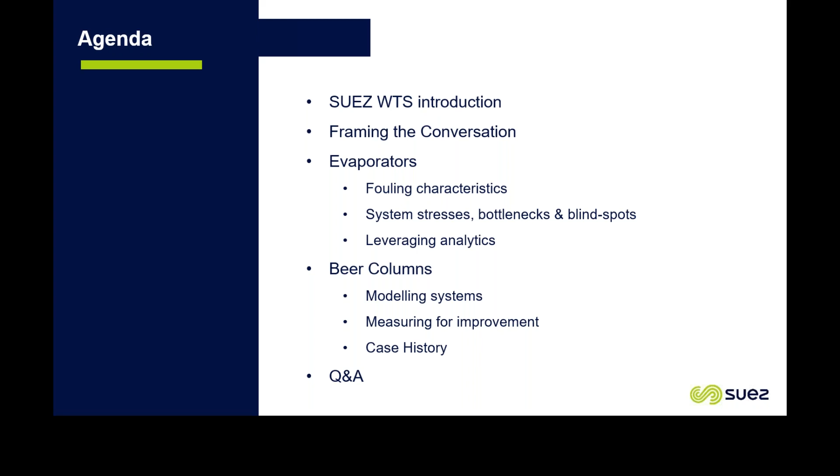So let's get started. It's possible some of you have wondered, who are those guys? This company called SUEZ.

My apologies there. I had a bounce. Get back here. Just a moment, folks. I'm getting myself in shape there.

There we go. So SUEZ has been around for a long time, and in fact, it's a French-based utility company that specializes primarily in large private municipal water and wastewater facilities. Dating back to the early 1800s, it's actually one of the oldest continuously operating multinational corporations, and as kind of in the picture there, we built a canal. That was the same SUEZ company in its early years.

Over the years, they've acquired numerous equipment and other water treatment related entities with names many of you may recognize, including some of the businesses that came with the 2017 acquisition of GE Water that is part of SUEZ Water Technologies and Solutions now. Degremont, Osmonics, Glegg, Zenon, Monsal, Sievers are just a few of the businesses that are now part of SUEZ Water Technologies and Solutions under the umbrella of the larger SUEZ organization.

Our history in the ethanol process space spans nearly 40 years, starting with efforts in gluten dewatering and fermenter deposit control programs, primarily in the wet corn milling space many years ago. Since that time, we've leveraged our core expertise in corrosion control, scale and deposit control, and separation technologies to develop a suite of products that support the challenges that face the ethanol industry.

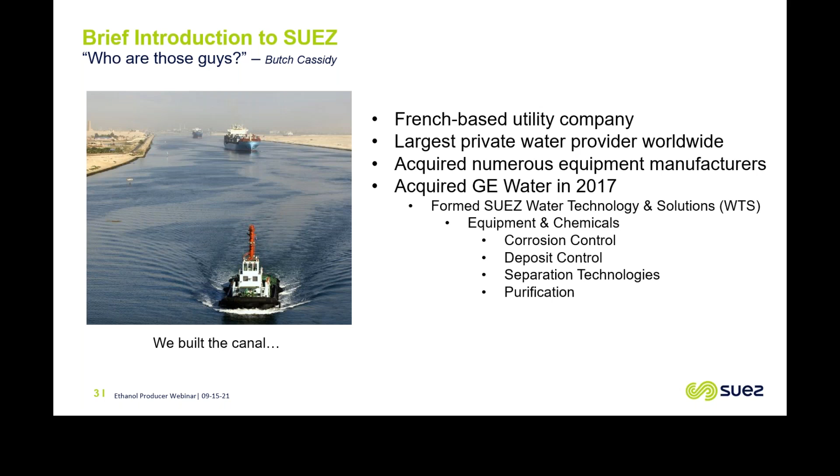So before we get into the meat of this webinar, I would be interested in getting a little feedback from you, and we're going to do this a few times where we'll ask some questions and you'll have an opportunity to provide feedback answers. Everything will be anonymous. But I'm interested in your feedback on some bottleneck areas. And so if we queue up the first question on what production areas are most impacted by bottlenecks in your site.

I'll give you guys a few seconds here to go ahead and click your answer and your response, and they'll all be collated for us here. And Tammy will have that information for us in a few seconds. I would play some Jeopardy music, but I don't have it queued up right now. But we'll give it about another 10 seconds here. Hopefully you know the answer to this one pretty quick since it's pretty general. All right, so how are we doing? You still getting responses in? If not, Tammy, if we can go ahead and pop up what we see. Okay.

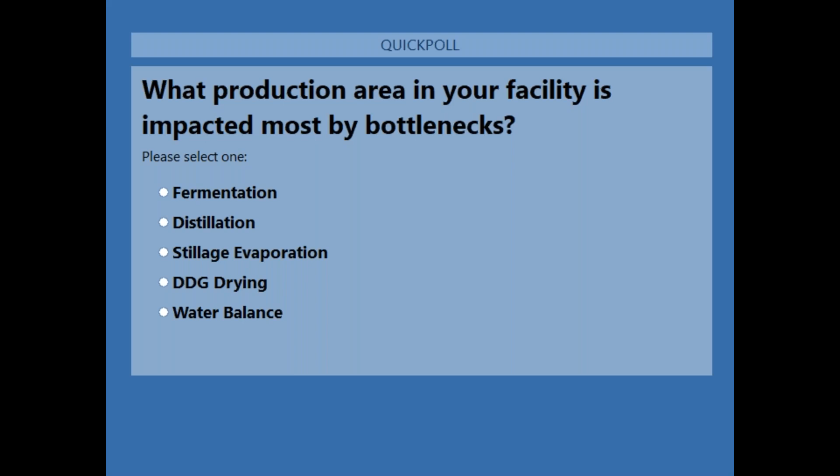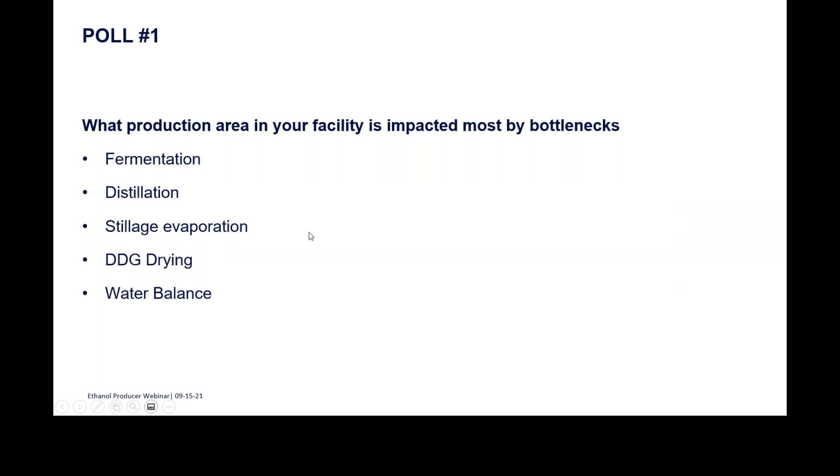So here it is. This is kind of interesting. This is kind of what we hear on a regular basis. So this crowd I would consider a representative group. Water balance is a big deal. And we're not going to be talking too much about water balance directly today, but we will be covering some things that may have an impact on it because they are impacted by evaporation operations as well. So we may actually be touching on those too. I appreciate the feedback here. This kind of level sets us so we're ready to maybe answer some of the questions you might have here. So let's move forward.

As we get started, as I mentioned in the agenda, we're going to be focusing on evaporation and distillation. And that said, many of the concepts we discussed can be used to improve any process. It's measure, control, improve, predict, minimize. When I was with GE, when they owned us, they used the acronym DMAIC, which is define, measure, analyze, improve, and control. And as with any process, if you can't measure it, you can't understand it. And if you can't understand it, you can't control it and you can't improve it. So that's the reason we look at analytics so closely.

Many of you have probably seen equipment conditions similar to some of the photos on this page. The pic in the upper left is representative of the typical evaporator deposits that form during normal operations. You see some plugged tubes, some debris that's in there. The four smaller shots down below are representative looks into evap tubes using a borescope. If you note on the third one from the left there at the bottom, you can note some of the clumping of organic material that is usually the first step towards plugging a tube. The last in this series are just some of the other attendant challenges that can come with deposition in stillage evaporator systems. That's actually a completely plugged syrup line. It's kind of hard to move syrup through that piece of pipe right there.

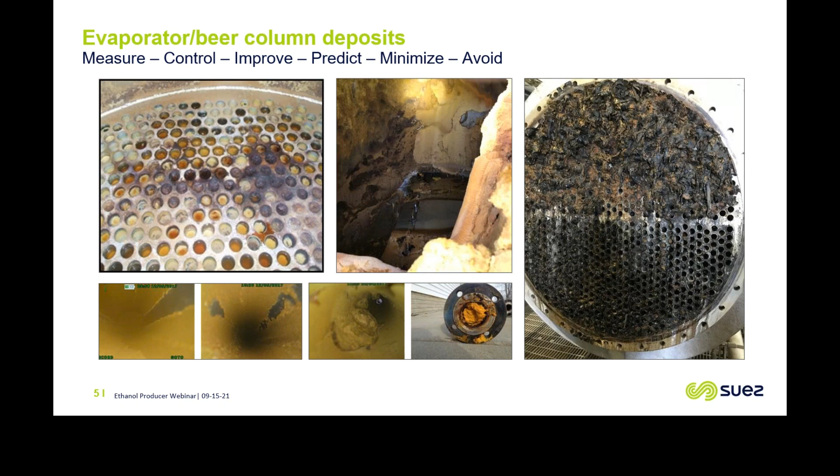In the middle and at the right are deposits that are seen in beer column systems. The middle picture is actually looking into the bottom of a beer column, while the photo on the right is clearly a reboiler that's in serious need of cleaning and was down for a hydroblasting. Depending on your plant design, either evaporation or distillation is likely providing similar operational challenges, and it's possible even in some cases where both may be going on for your site, and we'll be talking about ways to address both of them.

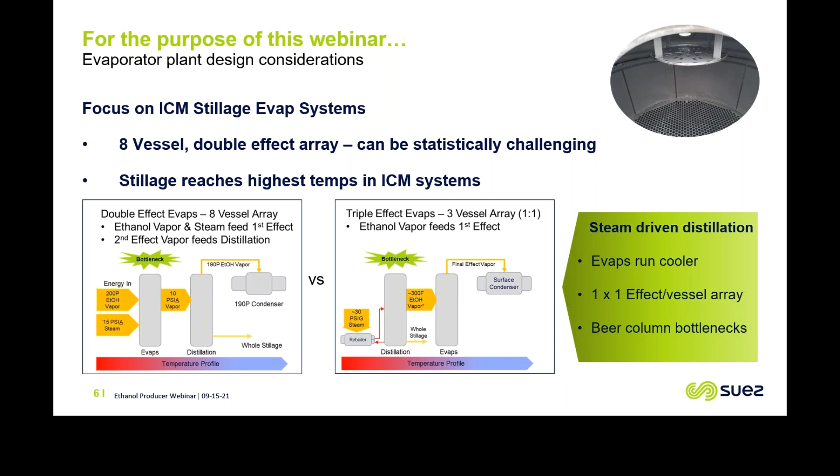So to further clarify, while we're discussing evaps, we're going to focus on the 8-vessel double effect evaporator array that's common in the ICM design facilities. There are more of these type of evaporator systems in the US and through the Midwest here than any other single design. The temperature profile of these systems typically yields the higher temps in the evaps than in distillation, so the evaporators are temperature challenged as well. Whereas if you look at the steam driven distillation systems, that temperature profile is the opposite. Now, we know from experience with high concentrated organic solutions that fouling will be more severe at those higher temperatures. And so, in addition to the higher temps, these evaporator systems are 8 vessels in 2 effects.

And so, selecting the right vessel can sometimes be a challenge since you have common inlet vapor and exit vapor lines that 4 vessels within each effect are going to be working against. So it's hard to tell which one may be the one that is in the most need of CIP, for example. And then if we just think about the job that evaporators are doing, we see this cycle of increasing solids going across the evaporators.

Film will start forming on tubes. If it gets to the point, as we saw in that earlier picture, the tubes will constrict, they'll plug. That's going to reduce some heat transfer area. That's going to result in a need for more energy, higher level of energy over less heat transfer, which means increasing the temperature and pressure. More tubes will plug. You repeat the cycle. Pretty soon the system's going to come down and you're going to need to do more aggressive hydroblasting type cleaning actions.

Now, hopefully this could be rectified through routine CIPs, but if those tubes are plugging, that more aggressive hydroblasting or mechanical cleaning is going to be required, because in a falling film evaporator system, once a tube's plugged, there's pretty little chance of opening it back up and gaining that heat transfer surface. So that's why it's pretty critical to try and stay ahead of things.

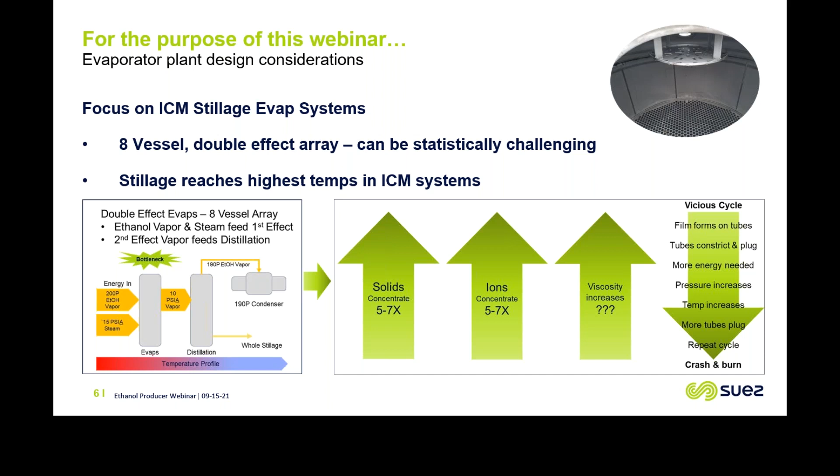So on the other side, as we get ready to look at the beer columns down the road, the steam-driven distillation system is that column, or the reboiler by design, is typically the highest temperature part of the system. That's usually where you see fouling in the steam-driven distillation systems. This will be more like a Delta T or Vogelbusch type of a design. And that fouling usually is the problem area.

The evaporators typically are not as much of a problem, primarily because the time between needing to take cleanliness actions on a beer column is such that the evaps, if there is any fouling, have an opportunity to clean those at the same time, since the plant typically has to take an outage to do the beer column. Other things that can happen in addition to fouling while it builds up in that column is you can also have some column flooding. You can have overhead vapor purity issues, and further downstream in distillation at the rectifier and such, you can have some challenges if you're not keeping that system clean.

So, based on this somewhat simplified view of the two areas where we're going to be looking in evaporators and beer columns, let's give ourselves a start on the evaporators. And what we want to start with is the end in mind. I'd like to use the following goal statement as our guiding objective. We want to run the evaps as clean, as long, and at the lowest total operating cost as possible. That's not rocket science. That's pretty straightforward how people want to run these things.

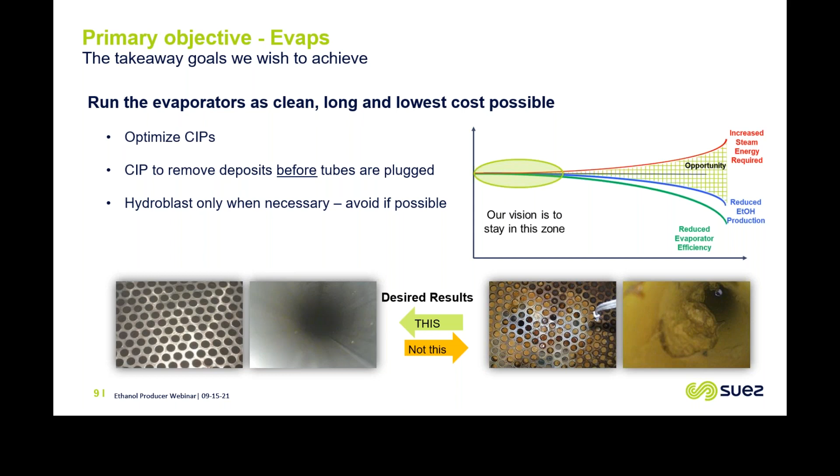What we want is to see the evaps looking like those bottom two pictures on the left rather than the right. And think of how much better your evap systems run when they're coming out of mechanical cleaning and you know they're in that condition. That's where our goal should be to operate these systems.

So let's think about evaporator performance in the perfect world. In a perfect world, the CIP is on a schedule that hits the evaps most in need every time, because fouling is predictably occurring at a consistent rate within each vessel. We'll not experience any process upset, such as power outages or high sugars or anything like that. And we'll have consistent production rates. We're going to run at X million gallons per year rate. We're going to have a constant thin stillage feed rate and all the other key process variables.

In our perfect world, we'll have a continuous, highly efficient operation of the evaporator system where pressure differentials will never increase to levels that could either impact the upstream dehydration or downstream distillation processes. I'd like to say it's kind of like the mythical Lake Wobegon, where all the women are strong, all the men are good looking, and all the children are above average.

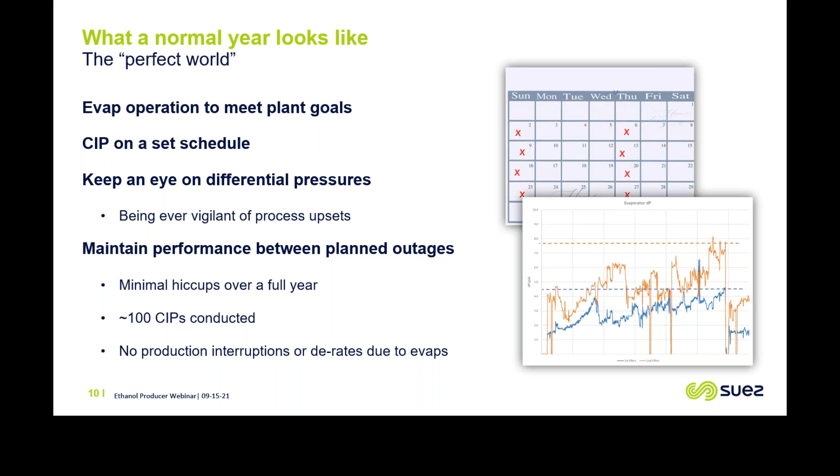That's the perfect world. Now, what we know is, in reality, we need to address issues that occur as a result of those truly normal operations. We will see power outages from time to time. We will see process upsets that may impact ethanol conversions, for example. We're going to see rapidly increasing steam pressures when these sorts of things occur. And it could even get to a point where it could impact the auxiliary systems, if you will, the dehydration up front or distillation on the back.

Increased base losses can occur when you have your pressures coming off these systems dropping below 9 psi, for example. Or you could be slowing down dehydration because your pressure differential is so great, you're running 22 to 25 psia steam up front to keep up. So it's really important to try to stay ahead of the cleanliness actions as much as possible. Now, operations may keep up with the CIP schedule and even throw in a couple extras where they believe they're necessary. And chemicals may be used to try to stay ahead of the fouling, whether it's online or with CIP additives, for example. The challenges are tough enough when the system is operating at the design plant rate.

The reality, however, is that today, in the competitive environment that we're in, most ethanol plants are running well above the designed operating rates. Now, most of the upgrades to allow this are like grind upgrades, additional fermenters, distillation improvements. That's made it possible even as the evaporator system remains the same size. I've not seen but one or two sites that have actually expanded evaporation as they expanded their plant. We know the systems were designed to be oversized in order to achieve manageable efficiency and cleanliness at that designed run rate with minimal downtime.

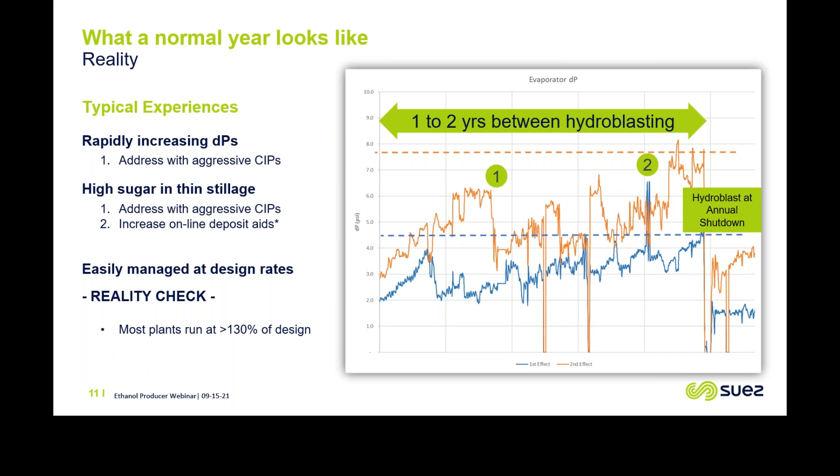I'd like to pose a couple more questions for the group, so I'll turn it back over to Tammy. The first one here is going to be just kind of a statistical challenge question. For this ICM design, what is the statistical chance of selecting the right evap vessel most in need of CIP? Give me what you think it is, and then we'll go to the second question, and we'll take a look at this one. Just remember, we've got 8 vessels in a double effect array with common headers, common steam inlets, common vapor exits.

All right, I don't know, Tammy, how the questions are coming in, if they've slowed down and everybody's answered. Give it about 10 seconds. Oh. Did I do that? There we go. Well, interesting.

The 12.5% is the winning number here. And from a statistical perspective, not knowing anything else about the system, that would be the right answer. But we have to recognize that we can look at DPs across each of the 4 vessel arrays. I would project 25% statistically would be what the correct value would be. 50% could be when you start to add in additional knowledge, and that's what the second question will be.

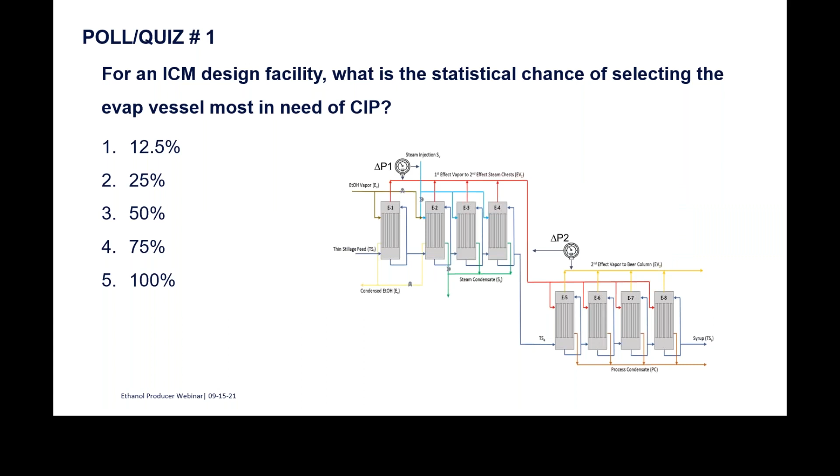If we can go to the next question, where what we're looking at is what drives your decision to CIP an evaporator. This may be the difference between 25% and 50% right here.

So we'll give it about 10 more seconds here. 5 seconds. Quick, get those answers in to qualify. All right, Tammy, if we can get our results.

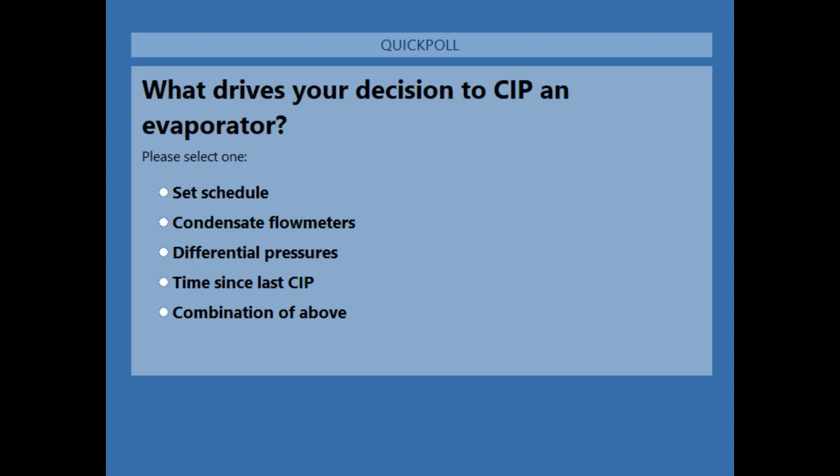And there we go. A combination, good. There is a lot of information that you have in your systems that should allow you to determine which vessels to select. Differential pressure is the most traditional way of evaporators and is very effective when we look at the steam-driven distillation type systems, delta T type plants, because that's a one-to-one multiple effect evaporator. So that delta P across an evaporator is going to give you exactly how well that system's running.

A little bit more of a challenge here because you have 4 vessels that are all on the same headers, and we'll look into what can happen with that here in just a moment. But the right answer is combination of above. Learn from your system. That's good to see. That's what we would expect, and that's how most people are operating.

Alrighty, thank you. If we can get back to the deck.

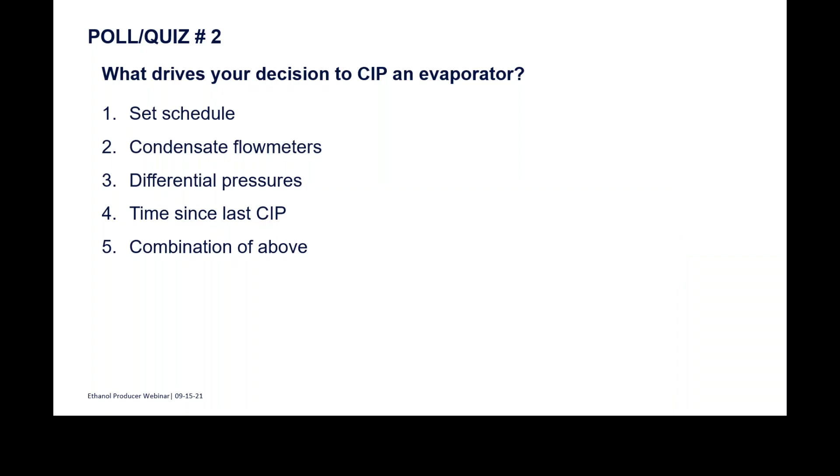And so now that we're done with our questions, if we think about most of the ethanol facilities today, they've got a pretty robust data collection, monitoring, and historian capability. We should be leveraging this information to help that all of the above decision process. It also will help us to develop some analytical tools and processes to drive improvement opportunities. Some of the basic data that can be used to identify these opportunities are the pressures and temperatures, operating logs for CIP solutions and solids and times, etc.

But note that what I've got on the list here is just a small sampling of what may become important to driving predictable, methodical performance improvement. As we learn more about a system, additional factors may be added into the analysis, such as solution pHs, enzyme usage, backsets, etc. are just a few more that might impact overall performance. As with any orienteering effort, in order to know where we want to go, we first need to know where we are, which means collecting and analyzing that data to identify and address the potential blind spots. So what we're going to do next is review some of these blind spots, just using the same data that you have at your disposal in an effort to understand and improve operational efficiency.

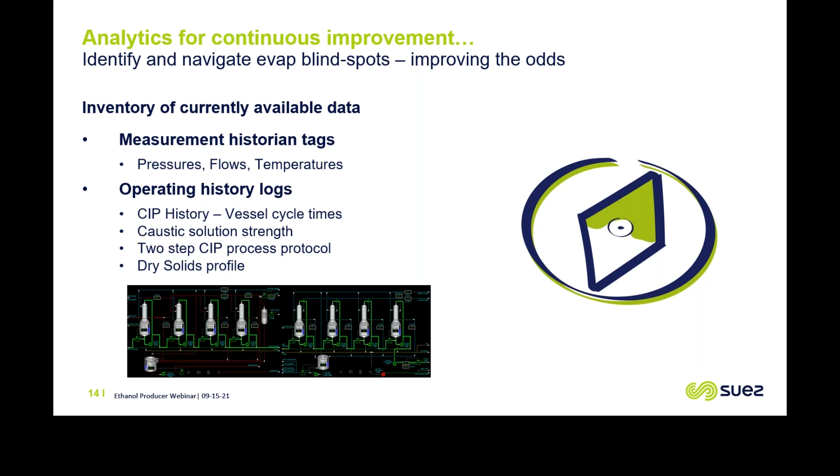The challenge with doing this is that the time required to conduct this testing can be about 4 hours worth of lab time when you take into account sample collection and the actual 3-hour dry time. You could also speed this up using the IR type rapid drying ovens and get it to a few minutes. The only caution I would note if you head down that path is that those devices provide results based on calibration programs that are developed within a relatively small range of the expected results. These are what are used to do thin stillage solids, for example, and syrup solids. If you were going to use it for an entire profile, you would want to set up some calibration programs between the thin stillage and the syrup levels to get more accuracy. Otherwise, you may be fooling yourself.

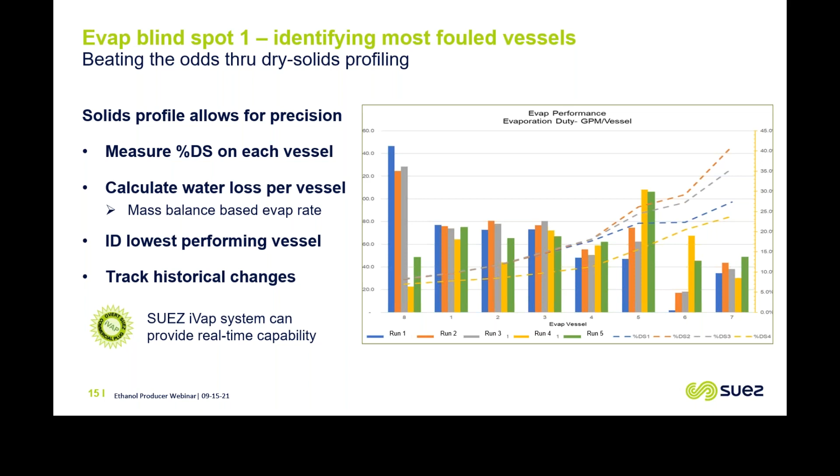I mentioned a few slides earlier about the importance of CIP selection and its impact on system performance. The profile analysis like this can provide the information to see performance relative to each other and which vessel is most in need of attention. For the next few slides, what I want to do is walk through what is actually going on and why this is so important to see what's going on in your evaporator system.

So to demonstrate what's going on when you put a vessel in CIP, I'm going to simplify the conditions to make math easy and assume a bit of a perfect world distribution of vapor across 4 vessels in this theoretical effect that we have. What we're seeing right now here is that system in a clean state.

In this case, we're spreading 100,000 pounds an hour vapor across 4 second effect vessels and generating about a 4 psi differential. Since each effect has a common inlet vapor and exit line, the actual distribution of performance will follow the path of least resistance. So in this case, cleaner evaps will do more than fouled evaps, but they're all going to have the same DP across them.

I know it technically looks like a pretty large system, but I picked 100 to use it as a basis, because then we can look at each vessel and kind of think of it as percentages, and you can do quick math thinking about how it would work for your system.

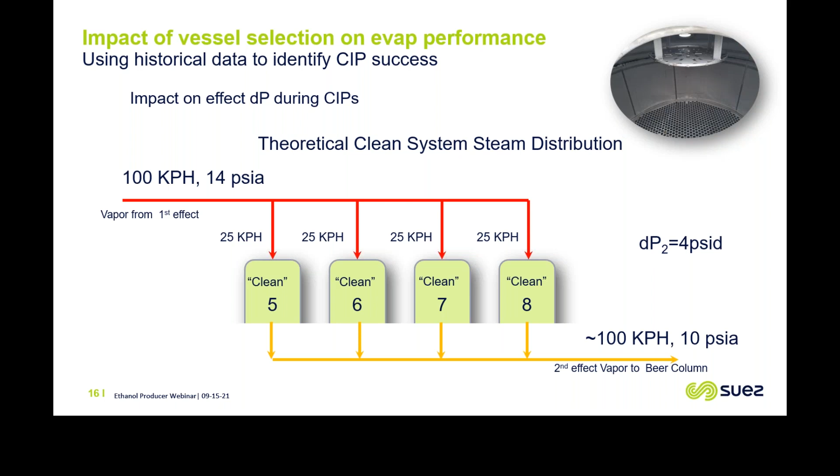And also that 4 psi pressure differential in the clean system may seem excessive. It's just for the effect, to see the difference between running clean versus running dirty, selecting wrong vessels. Your system's probably running closer to 2 psi when it's clean across each effect. So don't get hung up on that part of it, please.

So in our clean system, during the operation over time, we're going to start to foul. It's just what's going to happen. With thicker liquor typically going to foul the fastest, we've all seen this: as you get further down in that evaporator train and those solids start pushing upwards to 30%, you're going to get more fouling.

And when that DP is going up, that is our evidence, as we saw back in the poll question. Pressure differential is key. That's the evidence that you're losing cleanliness, and that increased energy is required to keep it running.

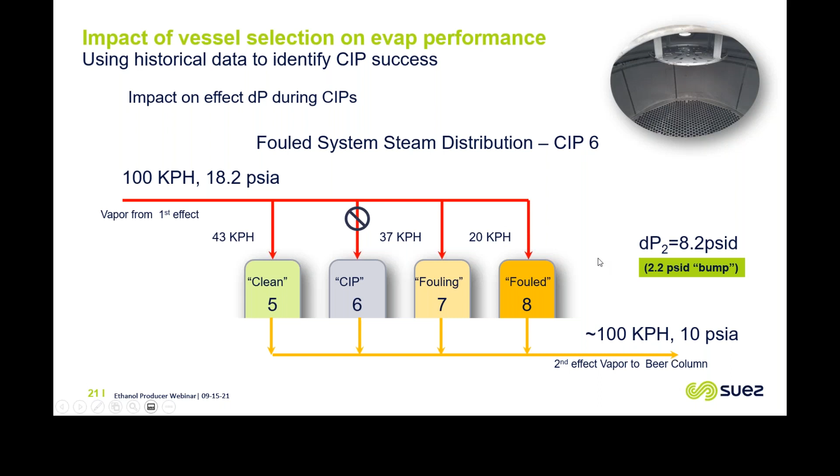If we do that, what we're going to see happen is we're going to redistribute that 30,000 pounds an hour that was in vessel 6 over the remaining 3 vessels. And remember, we already have a stressed out vessel there in 8 that is just going to continue to foul more and more at a higher stress.

If we look at what the load was on our bump as well, we could see our CIP bump was 2.2 pounds. When we took that system off, we saw a lot of pressure increase because we took a workhorse out of play. And it's important to make sure that we understand what the implication of that may be if we want to understand whether or not we're taking advantage of our cleaning actions.

And in fact, what we would see is it's possible that in many cases when we have that additional stress, the result will be little improvement or possibly even an increase in the DP across that effect when we come back off the CIP. In effect, what we're saying here is that the system is in worse shape after that CIP than it was before.

Now, why is that? It's essentially because we cleaned a clean vessel, and the remaining vessels were put at even higher stress and are even in worse shape than when we started to clean the clean vessel. That's why vessel selection becomes vital in systems already running at rates well above the design, like what we're seeing in ethanol plants today.

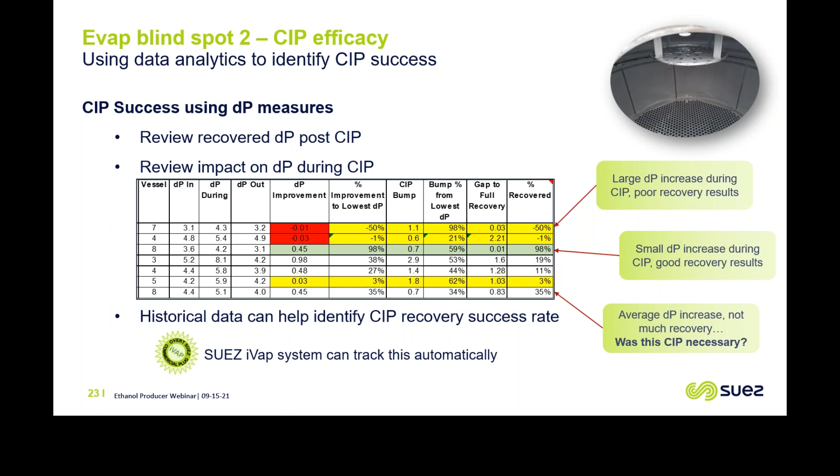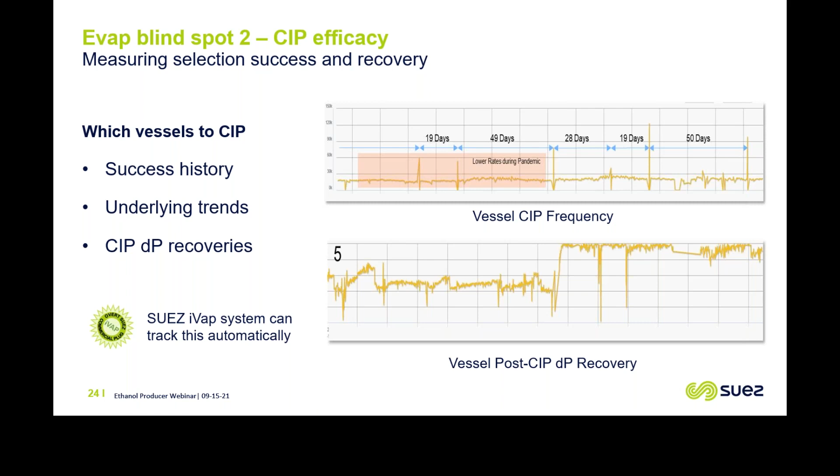The bottom chart here is actually showing evaporation rates on a vessel and measuring the improvement in the flow. What we have here is an increase in the actual evaporator flow as it moves forward. So let's move on to blind spot number 3, which is our CIP process itself.

So in our day-to-day work with ethanol producers, we found that the consistency of both CIP solution and the actual process cycle times can vary substantially from event to event within a single location, for example. Developing the discipline to optimize starts with developing a consistent, repeatable process that reduces that variability. Some critical items to check regarding CIP solutions are as follows.

The solution strength is key. Make sure you have what you think you have and what you're targeting. Usually, we're targeting somewhere between 3 and 5% caustic solution strength. This is important in breaking down the organics that that caustic is there to remove. If you don't have a high enough hydroxyl concentration, which is the OH part of the caustic, you're not necessarily going to have the 3 to 5% caustic solution you may think you have.

This could happen if you're using process condensate to make down or reusing CIP solution as part of your batch. You need to do more than just test for total alkalinity, which is a lot of times what labs are doing. Testing for the actual available hydroxyl is key to effective removal of those organics. And you want to make sure that is at the 3 to 5% of what you're shooting for.

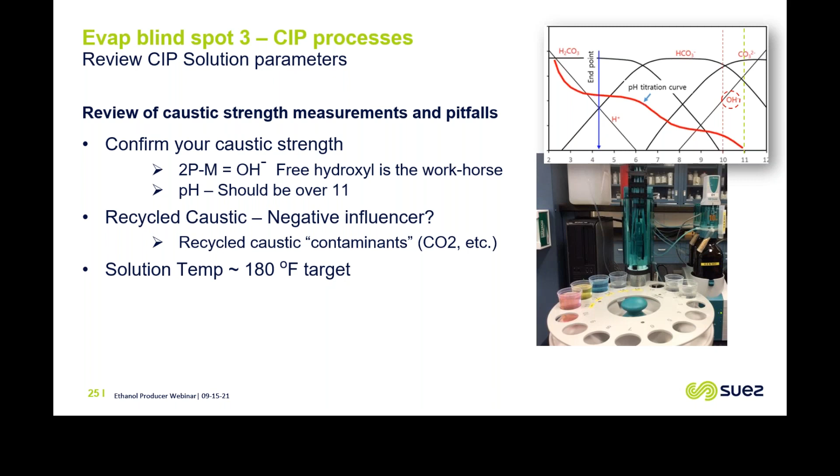The CIP solution temperature is also vital. Cooler solutions will be less effective. I believe most CIP protocols are targeting temperatures above 170 degrees to 180 degrees. Are those temperatures being consistently achieved for each CIP? If you track that, you might start to see a correlation between CIP success and actual performance in the vessel itself. Now, regarding the actual process, it may be possible to optimize the step times to reduce the total CIP cycle time and get back to full strength operation sooner.

I also want to point out here that if you're conducting a two-step CIP with an acid step following your caustic step, there are products available today, and yes, SUEZ does have them, that can address the removal of the inorganics that you use the acid step for, that won't be removed by caustic. This can allow a producer to eliminate that extra time and the acid, not to mention the reduction of the acid use and all the EHS aspects that come with it, and take care of both organics and inorganics in one step within your CIP.

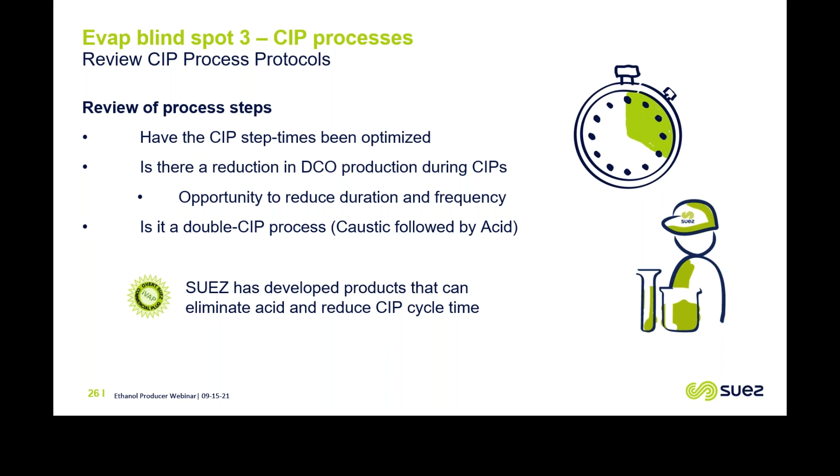So I'm going to shift here for a minute and review some of why these evaporator deposits, why we're so concerned with organics, why we use caustic. We've sampled and tested hundreds of evaporator deposit samples, and what we're seeing is these deposits are typically made up of better than 75% organic material. I guess it's really not unexpected when you think about what's in thin stillage. It's a lot of organic material.

But no less important, at a little lesser level, the inorganics, and typically magnesium phosphate and those types of scales will form due to the extremely high concentration that's coming in with the corn. There's a lot of mag phosphate that comes in with corn, on the order of about 7,000 ppm. And if you think about your evaporator system, that's going to concentrate up to over 35,000 ppm in the evaps. That's 3.5% in that syrup solution.

We deal with solubilities of inorganic salts in water treatment all the time, and to get to that level of solubility, it's a good bet you're probably precipitating mag phosphate. Hopefully, it's coming out and it is part of the matrix with the organics. But what we see usually is you can't control it, and it's also going to come out and leave mag phosphate scales within the evaporator tubes.

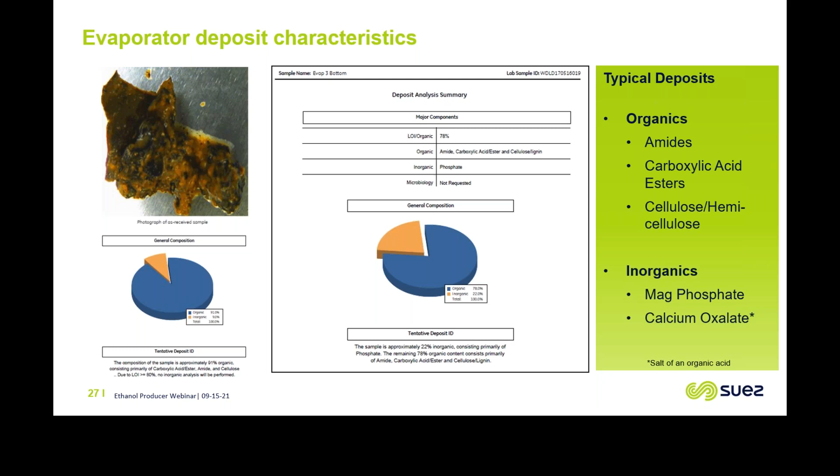In addition to that, there might be some oxalic acids in those deposits as well, which will combine with calcium if the conditions are right to produce a beer stone, which is calcium oxalate. And as I discussed earlier, the products that SUEZ does have for these, there's a couple different classes. These product classes include the inorganic deposit control that are designed to control the precipitation. As I mentioned, solubilities aren't as high as what the concentrations are. You may not be able to stop it, but you can control it.

In addition, we have an organic deposit control product that's designed to condition the organics within the thin stillage. And I believe it may be the only one out on the market today. This allows the solids in the evaporators to flow more effectively. They clump up less, which reduces the chances for tube plugging. And what we see is when you CIP, the CIPs clean up better when you're dealing with those organics. The primary reason to feed these is to extend that time between CIPs while improving the heat transfer. Remember, run longer, cleaner, and more efficient.

When you can extend that time and run more effective heat transfer, you're going to end up generating lower energy usage on a BTU per gallon of ethanol produced basis. So your evaporator essentially may help reduce your BTU per gallon efforts when you're starting to look at CI scores and other things that we see becoming more and more prevalent in the industry. So the reason to utilize the methods and monitoring we're discussing here is to support that, proving that if performance improvements can be achieved with such applications, the results and the associated economic benefits justify adding such products to the thin stillage or CIP solutions.

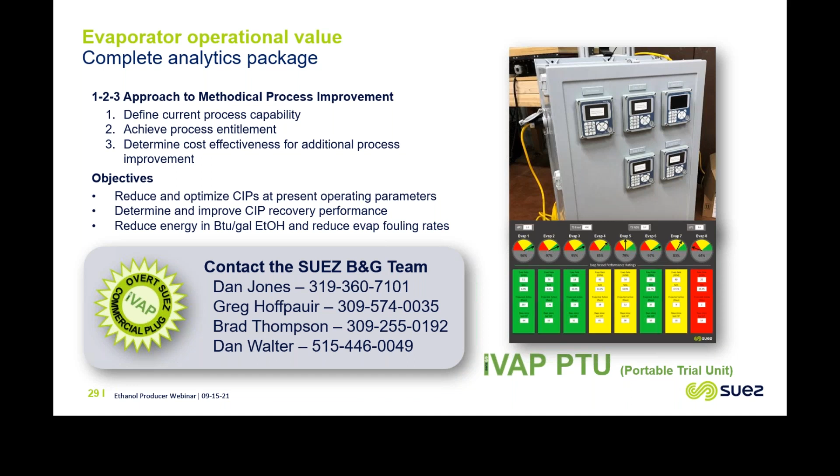So as we reviewed earlier on the beer columns, when we start looking at steam-driven distillation, that beer column and the reboiler are typically the highest temperature area. And we can use some simple data and analytics to optimize these systems just by a straightforward regression analysis approach in order to characterize the operation and look at it over multiple operating cycles between cleanings.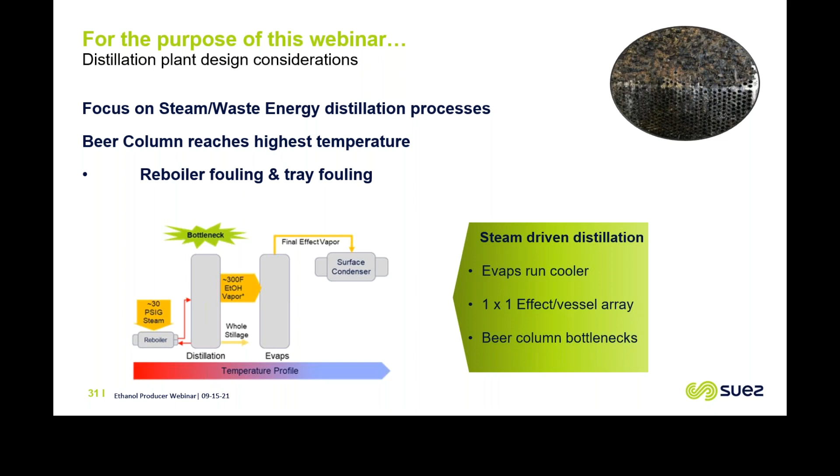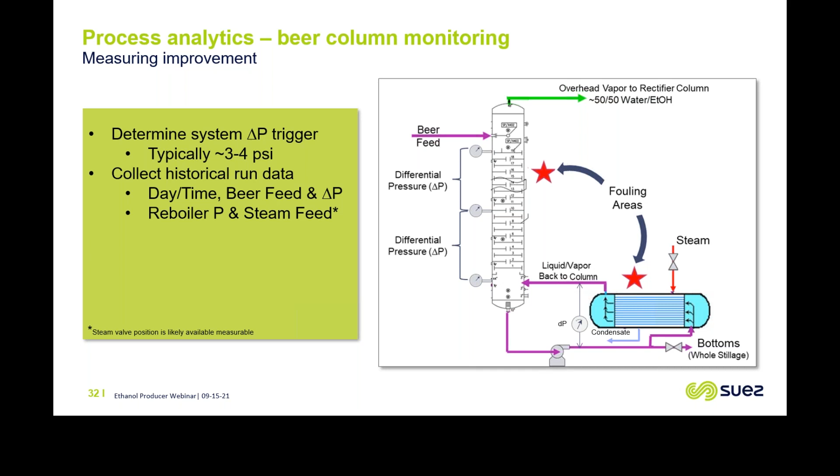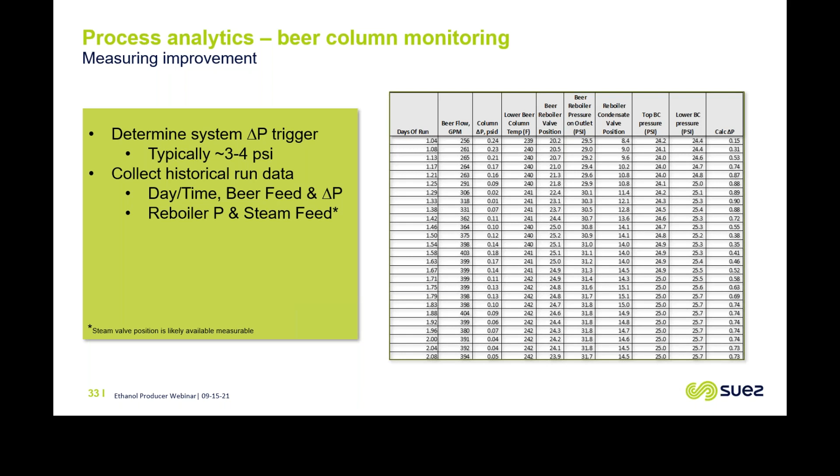Now, what this will allow us to do is collect data. It may be CIPs, the CIP timing, pressure differentials, steam to reboilers, etc., and we can use this to determine any changes by collecting that data, tabulating it, and then running a regression analysis on the multiple runs to identify which variables are exerting the greatest impact on performance, as well as develop current performance expectations. We could call this the baseline or the process capability, if you will. From here, we have the ability to determine if any process changes would be having a positive impact on column performance with the goal of increasing time between those CIPs.

Usually an economic analysis can be conducted that'll help in determining what performance improvement would be required to justify any process changes, whether it's chemical feeds or equipment additions or any of that. Understanding where we are before deciding to go where we're trying to go. That's the goal here, part of the orienteering, as you recall.

So here's a case where a deposit control program was developed and deployed in an effort to increase that time between beer column CIPs. And the resulting improvements on the baseline were easily measured to determine program success well before the end of this cycle. The same analysis can be deployed for operational changes such as specialty enzymes or to objectively measure the consequences of such changes on beer column cleanliness performance.

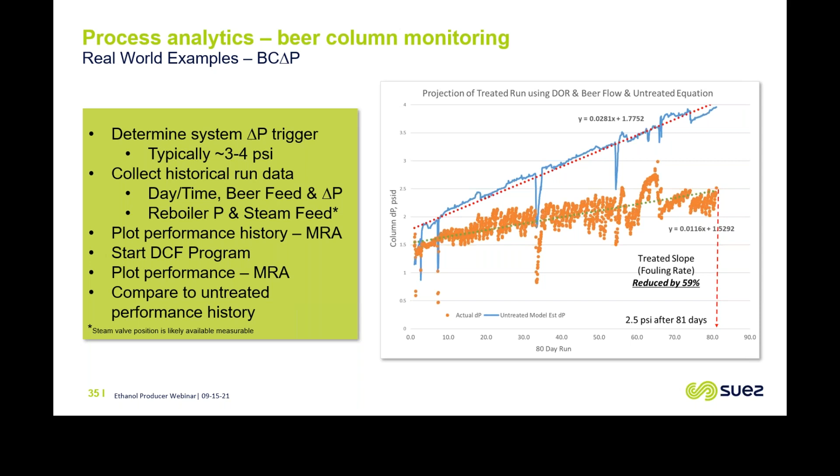The regression analysis can identify the performance improvement compared to how the column would have run in its original state. Ultimately, achieving a goal of longer runs between CIPs was actually pretty easy to capture. Either you get there or you don't. But by running the regression analysis, you can see if you're on the right track well in advance of the time.

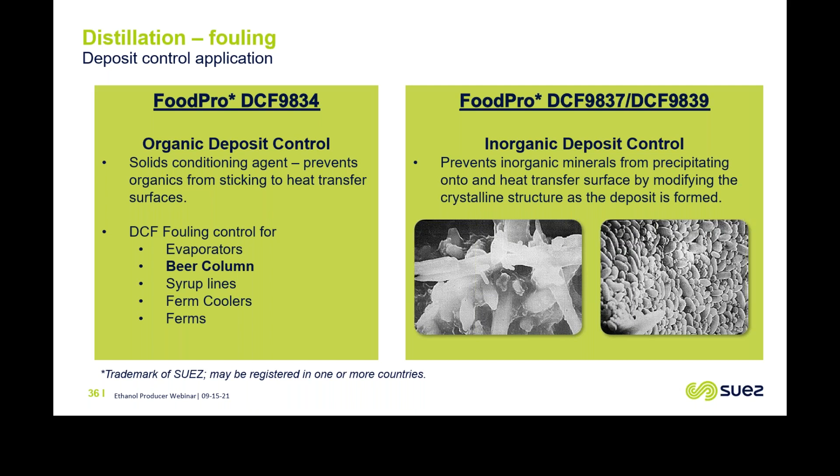Now, we do feed the similar type products to these systems for the exact same reasons. You're typically looking more at organic fouling within distillation columns, though. So usually you'd be looking at the organic deposit line from a SUEZ perspective. And the reason for that is because the deposits are coming from the same stuff. We're talking about the beer, which is just a few steps ahead of thin stillage. It's got all of the same actors in it.

And so when we do deposit analysis out of reboilers, out of beer columns, what we see is the same and even higher amount of organic fouling that we're finding. And that's what we're trying to slow down in order to keep these systems running longer.

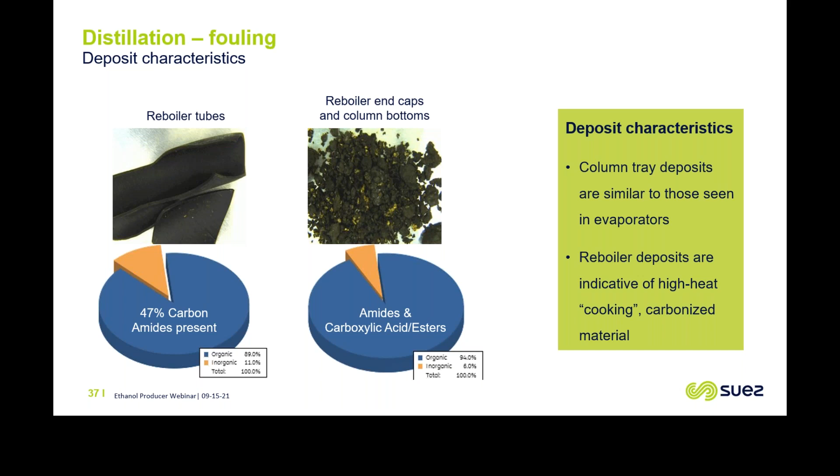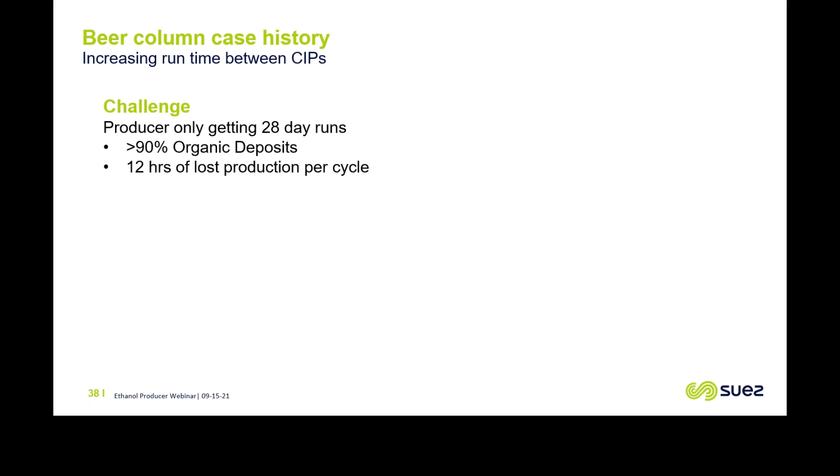So to close here, what I want to move to is a case history on beer columns. Here's the case of a producer who was averaging about 28 days between the beer column CIP actions. They wanted to extend the time in an effort to reduce that downtime and improve their column operation. They used to run longer, but now they're running harder. They're not getting as much time on this particular column. At SUEZ, we proposed the FoodPro DCF9834, which is the organic deposit control agent.

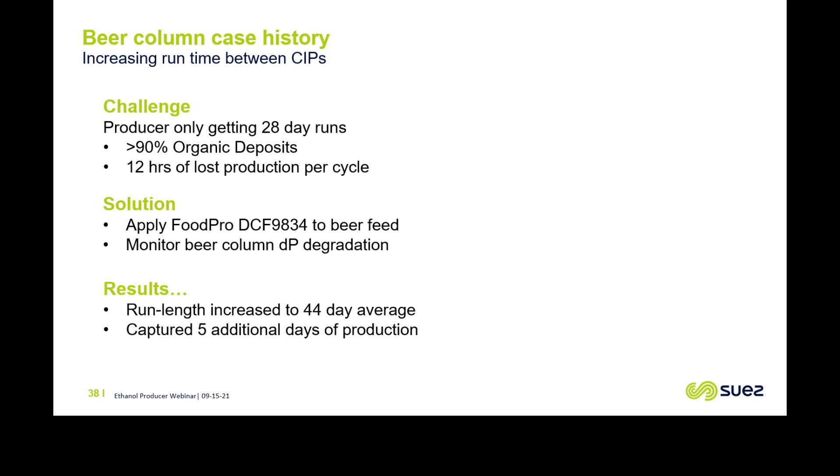The system was monitored to ensure positive results were being realized from the beginning of the trial. And the results were a run length that was increased to 44 days on average, which is 5 additional days of production annually. And as a side note, in this particular system, while it was treated, we also saw cleaner beer column overheads. This site had been struggling with a little bit of fouling all the way through to the rectifier, and this helped clean up that as well.

The bottom line for this application, after accounting for the treatment chemical cost, was an annualized net savings of $880,000. So it proved itself out, and through analytics, we were able to justify the program and generate the results this particular producer was looking for.

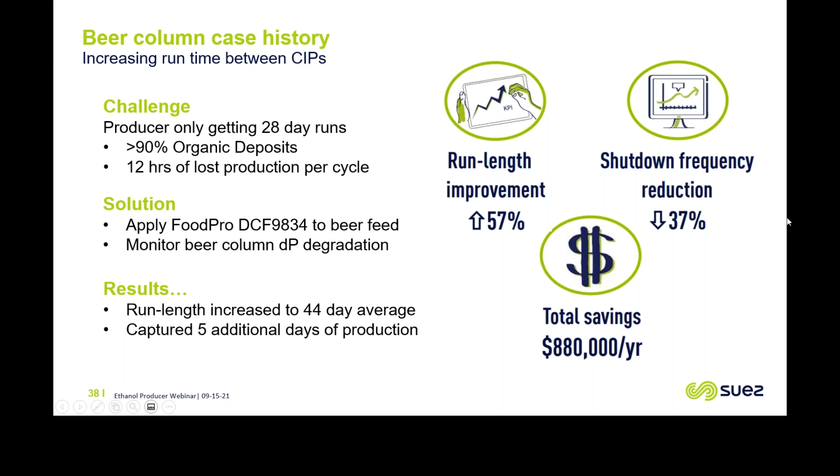Yeah, Dan, thanks. Kind of curious how the front end bolt-on process improvements that producers have been adding to their plants have affected the evaporators, and what have we seen, or what have they needed to do on the back end, or how have those front end processes affected the back end?

That's a good question, and it's kind of interesting because we talked a little bit about trying to get more out of ethanol plants, and a lot of the move now is to get higher value co-products that those front end bolt-on processes are helping to achieve. What we're noticing is that while you're cleaning up the thin stillage, if you will, reducing the amount of solids because of capturing those and getting a higher value product, when it goes into evaporation, what ultimately is occurring is the evaporator residence time is increasing by a factor of 3 to 5. And we talked earlier about all these solids and the inorganics as well.

The inorganics are still in that stream coming in, so that 7,000 ppm mag phosphate stream is not going to stop at 35,000. It's going to be closer to 140 to 150,000, or 14 to 15% of the ultimate syrup, which just puts even more pressure on the evaporator.

So I would say that it would be more important to be monitoring as much as you can around that evaporator system, or you could end up back-to-back trying to catch up and stay ahead on evaporation, even though you think you're putting in cleaner thin stillage. Time and temperature. It's all time and temperature.